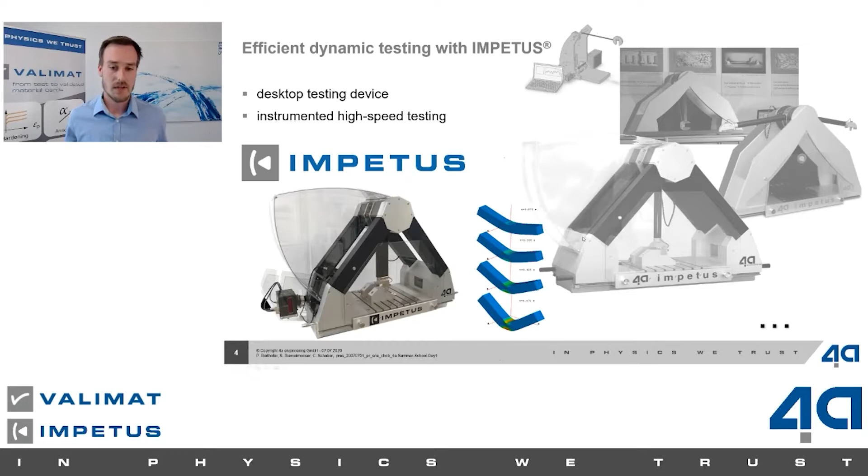First, I will talk a little bit about the IMPETUS itself. The IMPETUS is a desktop testing device. What does this mean? The IMPETUS is a testing device which doesn't need further infrastructure.

For example, on a big dynamic testing machine, on a servo-hydraulic testing machine, you always need a really good fundament and a really stiff floor to set it up, and you also need a strong power supply to use a high dynamic testing machine. Our testing machine also does dynamic testing, and therefore we can just put it on a table. This is the big advantage of the testing system IMPETUS, I think.

To the characteristics of the IMPETUS testing system, we can reach 50 joule of impact energy. What does this mean? The impact energy depends mainly on the mass of the swing hammer, which ranges from 1.5 to 5.5 kilogram. It also depends on the impact velocity, where we start at 0.5 meter per second and can rise up to 4.4 meter per second. With this combination, we are able to reach 50 joule.

Now I will show you a short video of our testing system, where you can see how the main workflow is through testing with Impetus.

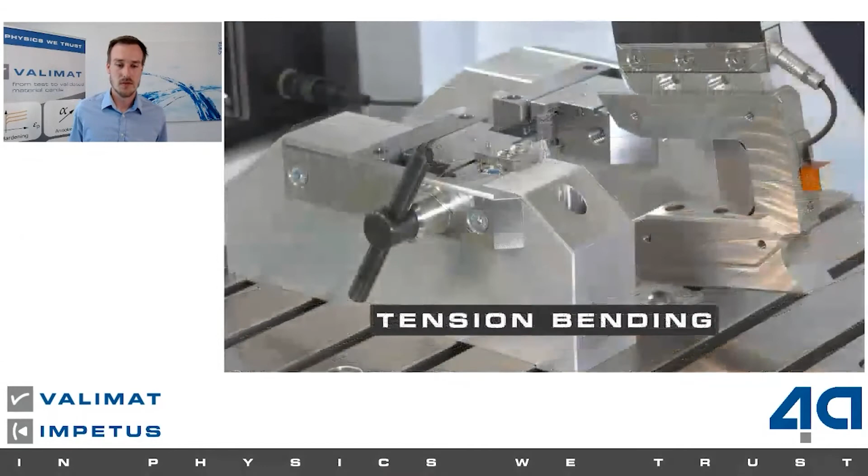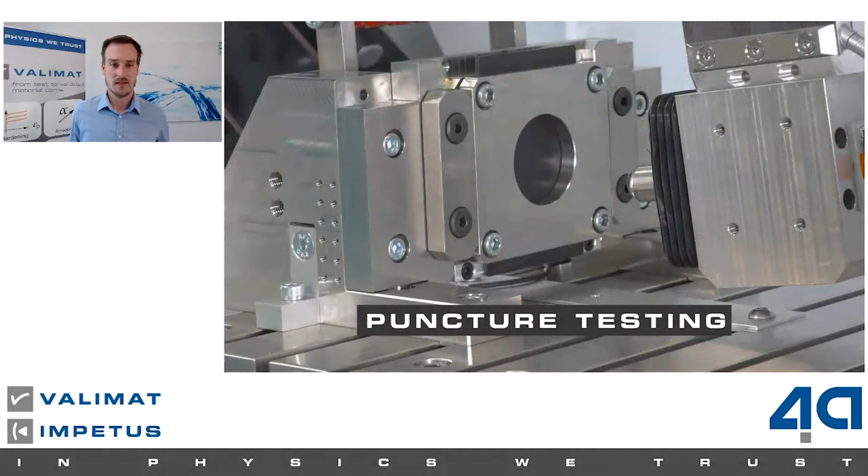Here you see a good look at our 3-point bending, tension bending, and puncture test. Here's a component test - it's a 3-point bending with small components, and the tensile test. Now you will see how we perform a test.

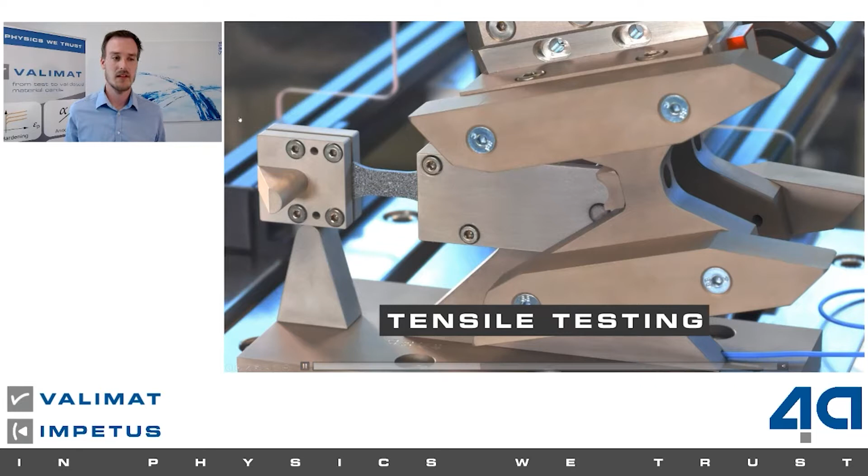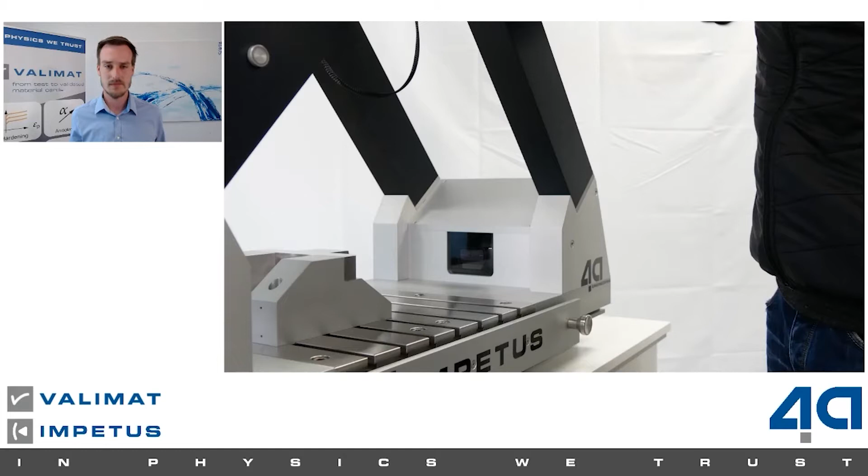Now we continue. As I've mentioned before, it's a really universal testing machine, so we're starting just with bending but developed with every new setup. Here we put in a bending sample. We have to close the safety screen and raise the arm to the decided velocity. The arm stops at the height we've decided before. Just once again - now we can push the green button.

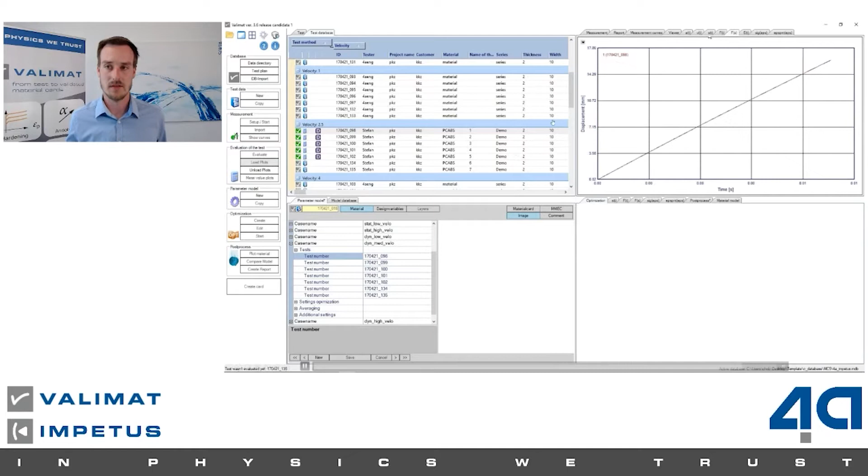The pendulum arm hits the test piece and the data is saved. You can directly see the data in the software we have evaluated, and you get, for example, the force displacement or the stress strain curve directly after the test.

Okay, so I hope it shows you the main workflow of how we operate with our system.

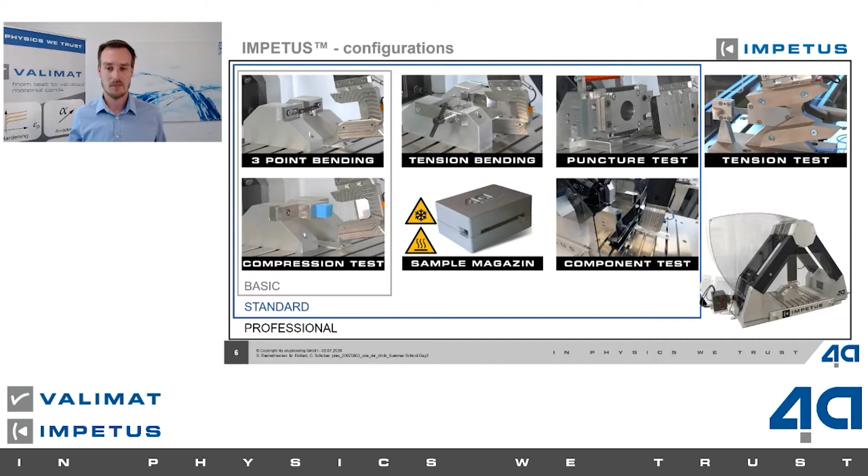This slide I will show you because you always have to think about your material class, what you'd like to test, because the material class depends on what test you can perform. So if we think about a plastic test sample or a thermoplastic material, for sure you can perform a 3-point bending test, a tension bending test, a puncture test, and a tension test. But you always have to keep in mind the dimension of the samples, and in particular you always have to think about the thickness of the sample.

For foams, we do compression tests for sure, so we can investigate the compression behavior of foams in a really high dynamic range. Composites will be tested with puncture tests and for sure with 3-point bending.

Here the last two materials are aluminum and metals. For sure we can test aluminum and metals with our system, but there are slight differences between them. For aluminum, we can also investigate the deformation behavior, and we reach failure in the tension test or in the tension bending test. But with metals, it's hard to reach failure, so we're mainly investigating just the deformation behavior, because we don't have that much energy for metals.

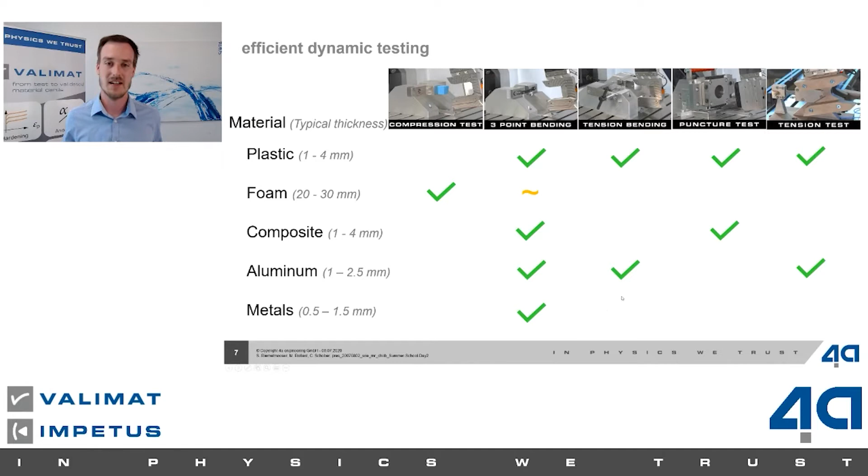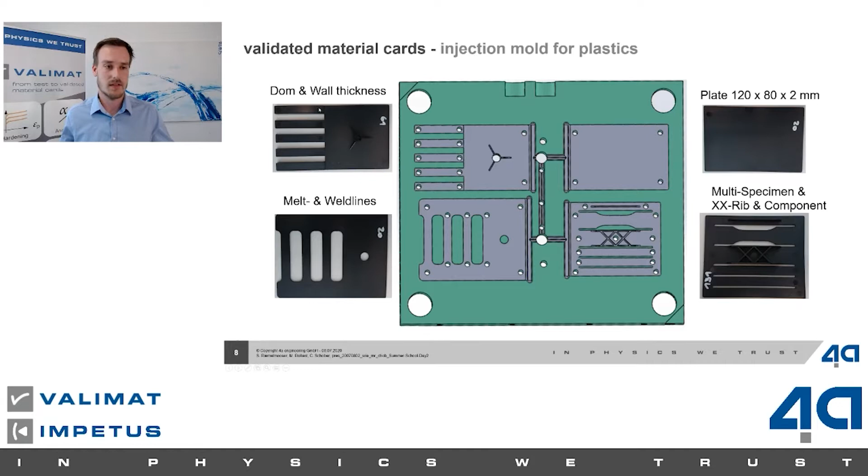When we use this plate, we also use it for the puncture test. This right plate is the component plate. Here you see the tensile test piece and a component. This component is called the XX-rib, where we can validate our material card. On the left side, you can see a plate with different thicknesses of this material, and we have a melt and weld line plate.

Okay, and now the last point I will show you today is a little bit about the measurement technique of Impetus, what we are measuring. In the tests, we use two acceleration sensors - one sensor is mounted on the pendulum head and one on the counterbearing side.

So we don't measure the force directly. We measure the acceleration of the pendulum head, and out of the mass of the pendulum head multiplied by the acceleration, we calculate the force.

The third sensor we use is an angle sensor. It's on the top of the test system. This angle sensor can give me a displacement with really high accuracy - we're reaching about 0.01 millimeter.

For sure, we have a bending fin and a support with a radius of 2 millimeters as standard. We can change it to a 5 millimeter radius if we want. As I mentioned before, we have a swing hammer mass of 1,580 grams. This could be increased by adding some additional mass, and when I add some additional mass, I raise the swing hammer mass, so I get more energy, more impact energy.

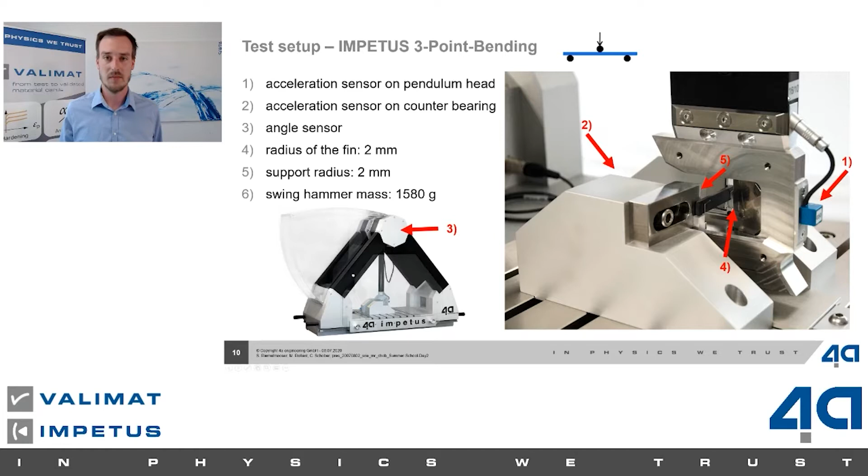And this slide shows you the raw data of the measurement system. It's important to know that we always store the complete unfiltered raw data in our database, so you are able to change the filter and to evaluate the test data again and again. But this topic I also will talk about on Wednesday in detail.

The red curve is the acceleration curve of the swing hammer. The blue curve, nearly a zero line, is the acceleration signal of the support. We use this support acceleration just to check if everything is fixed in the pendulum, because when the counterbearing system is not fixed, you will get an acceleration signal on the counterbearing, and you'd know something was going wrong in the test. But with this zero line, it looks good.

And the third channel we have here is the angle signal, which is decreasing as it falls down from the pendulum arm.

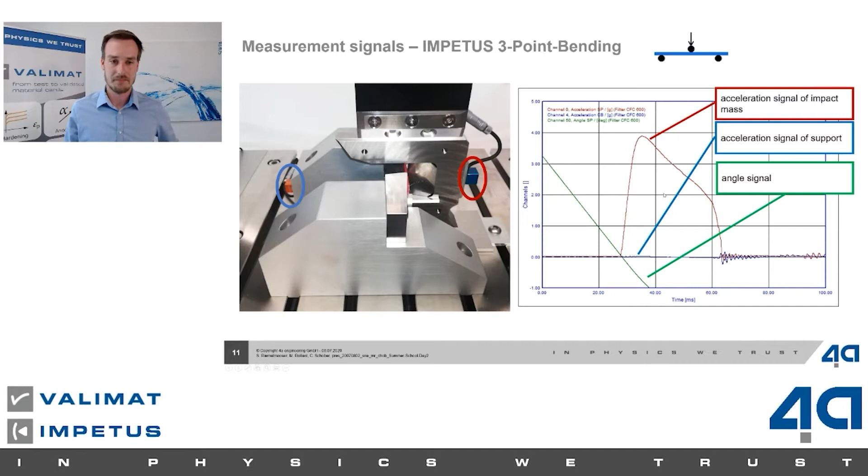This is the viscoelasticity and the viscoplasticity here in the force level. And not only the deformation behavior changes over the strain rate, also the failure changes with the strain rate. So we get an earlier failure at higher strain rates. And this you can see directly out of the measurement results.

Okay, so just a general overview. In LS-DYNA, we have around 265 material models implemented. In our case, for a plastic material, it usually comes down to the most used material model, which is MAT24, which we talked about in detail yesterday. And then there are other interesting material models for a thermoplastic polymer, such as MAT124, MAT187, and MAT187 Lite.

So what exactly are all these material models and why should you think about using them? Okay, so the MAT24, the workhorse, we spoke about it yesterday. We had a session where I showed you how you could fit an elastic viscoplastic material model for a polypropylene material.

So just to summarize, or look back, what is the MAT24 material model? It is a material model with a von Mises yield surface. You cannot define viscoelasticity with this model. Viscoplasticity is included. There is no tension compression asymmetry because of the von Mises definition, and you have the plastic Poisson's ratio of 0.5. So what does a plastic Poisson's ratio of 0.5 mean? It means that we have plastic deformation under a constant volume.

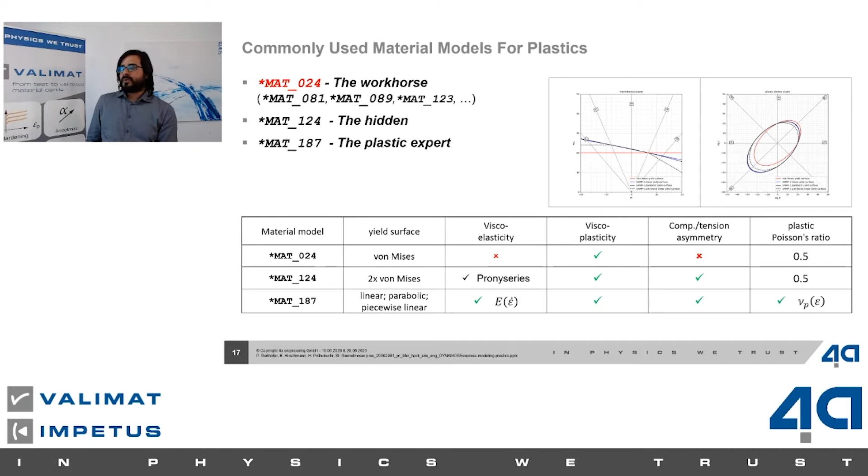You can incorporate that in a lot of different ways using the Drucker-Prager yield surface or even a general yield surface. But by far, the biggest advantage here is that you can actually define a plastic Poisson's ratio, which means you can take volume dilatation into account, which for a ductile material becomes very important.

We will have a very detailed look on this material model next week, so two of my colleagues here will talk about that. So now I've told you the good about MAT 187.

Now it's time to come to the disadvantage. The biggest disadvantage is that because this model is so accurate, so well formulated, the biggest problem comes with the computational effort. So by far, out of these three models, MAT 187 is computationally the most expensive material model.

LS-DYNA has recognized that, and they have provided us with a new model called MAT 187 Lite, very aptly named because it's an efficient version of the MAT 187.

So the one simplification that they have taken into account is the yield surface. You can define it linearly. You can, of course, define compression tension asymmetry and also take volume dilatation into account.

So we have implemented most of these important material models for plastics for all different solvers. So if you go into the idealization tab, for our viewers who were here yesterday, they are very familiar now, I hope, with the model database.

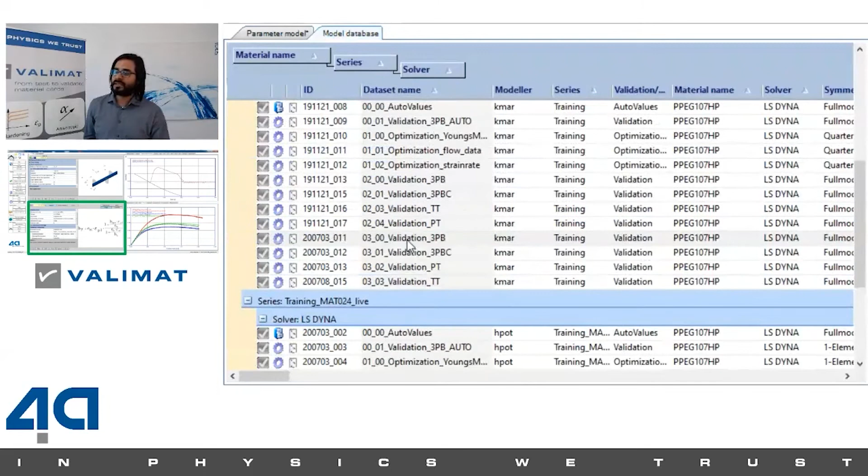So this window at the bottom left, this is exactly what we had yesterday. So if you go in one of these model databases, that is how that looks like. So we have the idealization part.

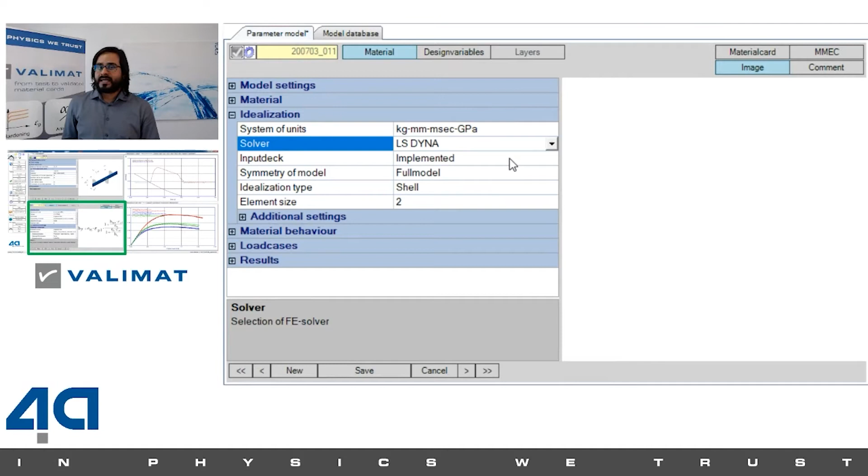And here you can specify what system of units you have, what is your solver. So we have different solvers defined here. Input deck is basically what is your validation that you want to do.

So it's a 3-point bending. Is it a puncture test? Is it a tensile test? And as I told you yesterday, all of these models are predefined.

So automated FE models are predefined, so symmetry of the model. We have also the idealization type, so shell or solid, and also element size.

When we go back into symmetry of model, we are extremely flexible here. So for load cases where it is possible to actually have all these different symmetries, they are all well defined. For example, for a 3-point bending test, we can work minimum with a half model.

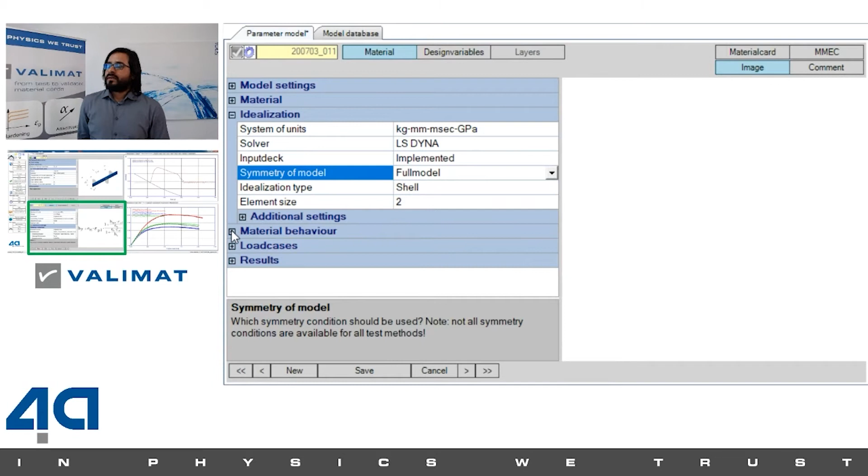And then we go further, first of with additional settings. Additional settings are basically you can define your element type. For the shell element you have selected...

Some extra parameters that define parameters in your automated finite element mesh. For example, the friction coefficient between the sample and the holder, for example, in a 3-point bending test. The Young's modulus of the support, the density of the support. So these are all the things that are automatically selected for you.

And then we have a very important number of element layers tab, which for shell elements becomes very useful because it basically gives you how many integration points you have over the thickness.

And then we go down. So VALIMAT is very easy in the sense that if you run through from the top to bottom, you can basically define your whole material model and you're ready to optimize or validate your material model. So then we go into material behavior.

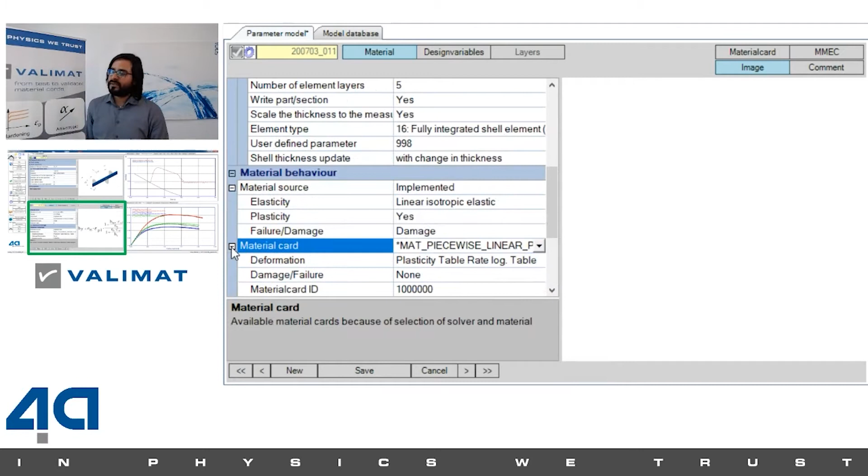This is the most important. So you see material source - they are implemented material models. And then we have a pre-selection of all the different material behavior.

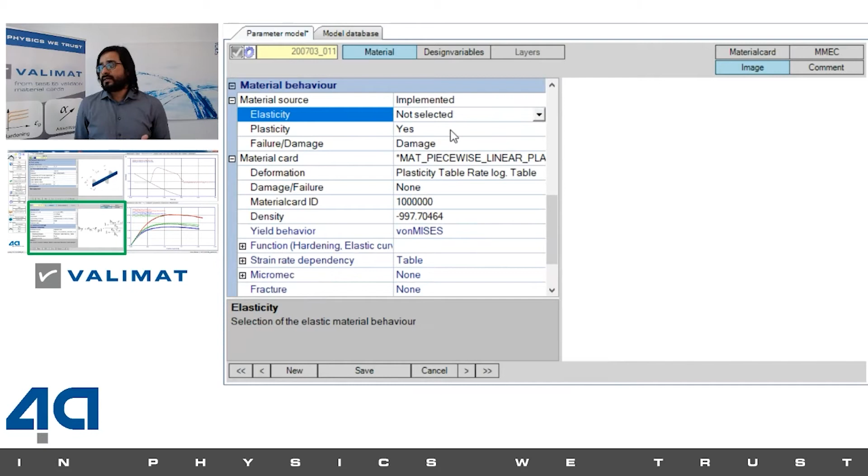So we have elasticity. So what do you want to have? A linear isotropic elastic, non-linear isotropic elastic, or an anisotropic elastic material. So if you put it on the top to not selected, you basically get a list of everything that we have.

So I would suggest my colleague put everything to not selected so we can see all the implemented material cards for LS-DYNA. So here we have a complete list.

So we have the simple MAT elastic, which is just an elastic material model. We have the MAT 24 that we looked at in great detail yesterday. Then we have some other models, MAT plasticity with damage, MAT 81. And then this complicated, very complex material model, or the plastic expert, which is the MAT SAMP-1.

Then, following that, we have some material models for composites, which my colleague, Mr. Reithofer, will talk about in detail on next Wednesday.

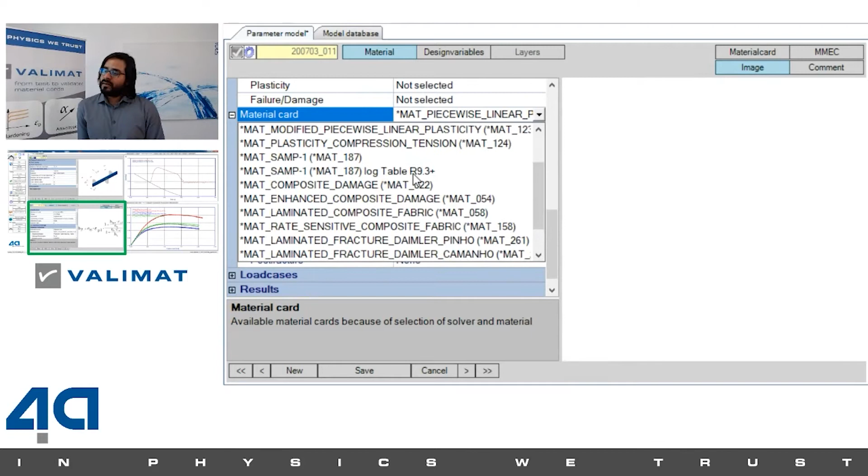So what I suggest to do now is I will just select the MAT SAMP material model, because we looked at MAT 24 yesterday. So after you select a material model, there are two important aspects: you select your deformation behavior, and then you select your damage behavior.

So when we go into deformation behavior, then we have a selection of the different yield surfaces defined. von Mises, the simplest one. Then we have the pressure-dependent Drucker-Prager, which has tension-compression asymmetry inherently defined. Then a parabolic yield surface and a general yield surface. So these are the options that the user has that he can calibrate his material model on.

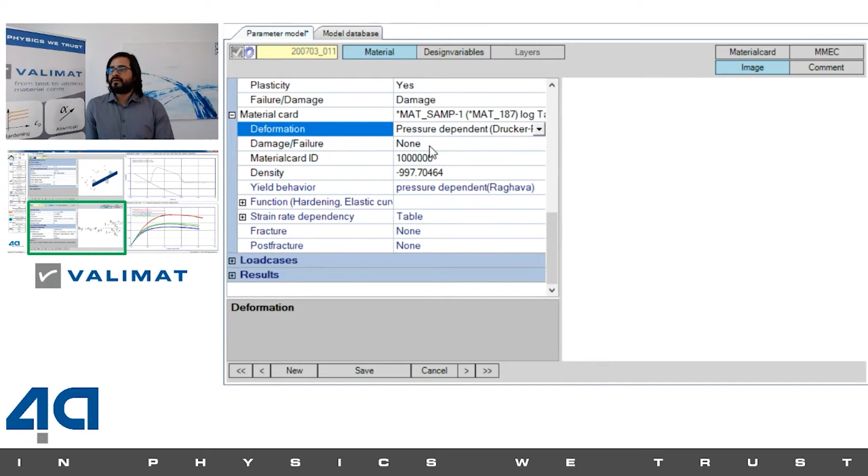So I would suggest we go to a Drucker-Prager here. And then the next decision we need to make is about damage or failure. So do you want to have damage or failure in your model, or you don't? So we go to add matte, add erosion DIEM, because that is something we looked at yesterday, the damage initiation evolution model.

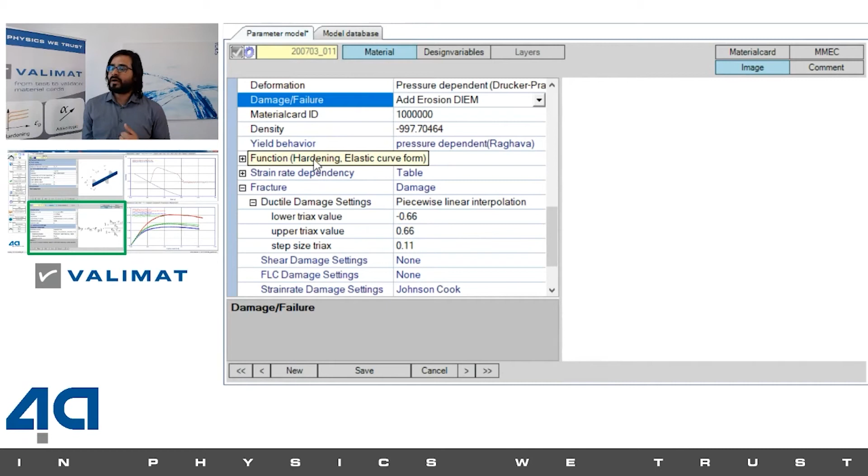And now you've pre-selected your deformation and your damage options. So now you go into detail about your selection, starting with your hardening function. Yesterday we looked at a 4A model, nue 0.5. The reason was, as I explained yesterday, we have plastic deformation at constant volume. So this is the model that defines that.

But now I would want to go into detail and say, no, I want to have a plastic Poisson's ratio definition. So we have the 4A model nue for that, or we have a whole host of hardening functions you can calibrate your material model on.

So you can either define this curve new, or you can, for maybe an easy implementation, say I would like to just scale my curve 1, for example. It's an easier way to go around it, and it's easier to understand for a first-time user to go through the software.

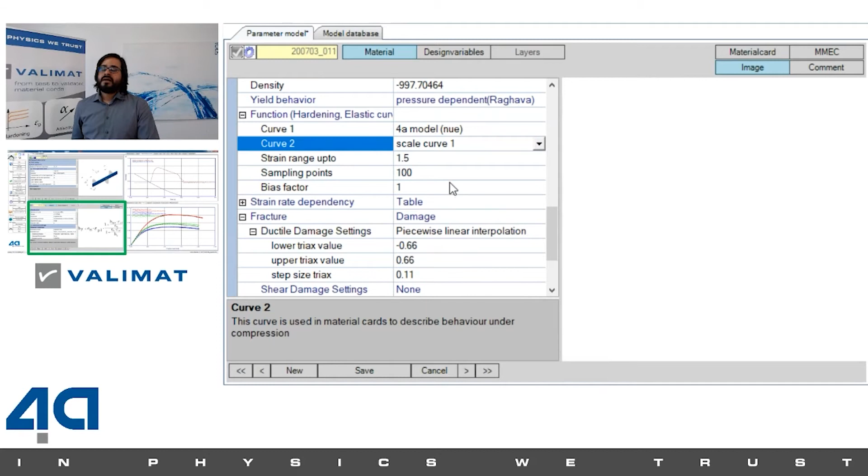Then we have the strain range up to, and the sampling points, which I've told you before yesterday was about having the right length of the hardening curve for your application. Because if it's too short, then the internal solver interpolations come into play. We don't want to have that. We would like to be as accurate as possible with our strain range definition.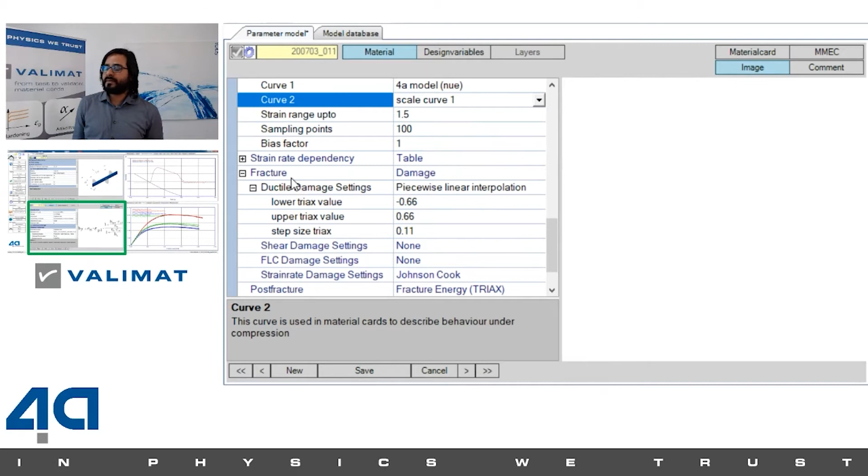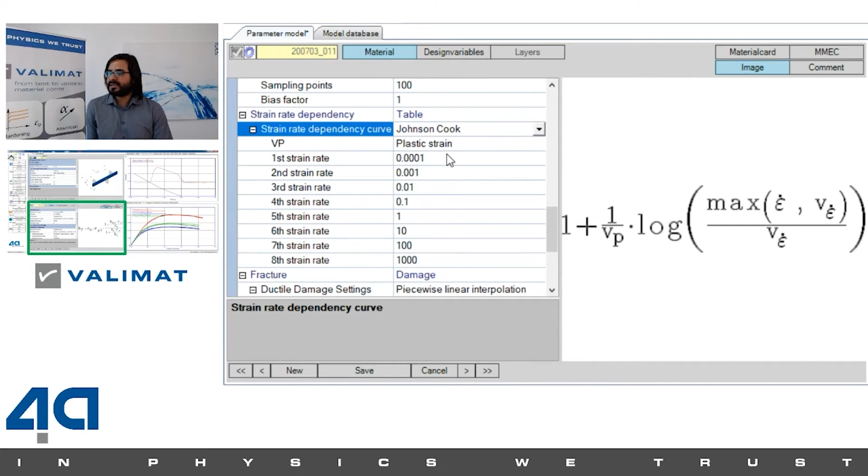Then you have said, yeah, I've defined my hardening function. Now let's define for a plastic the most important parameter, the strain rate dependency. Again, for strain rate dependency we have different models incorporated, so Johnson-Cook, the very popular model for strain rate extrapolation. So we go select Johnson-Cook, the strain rate dependency based on plastic strain formulation, or you can also use total strain formulation. And then you can define all your different strain rates.

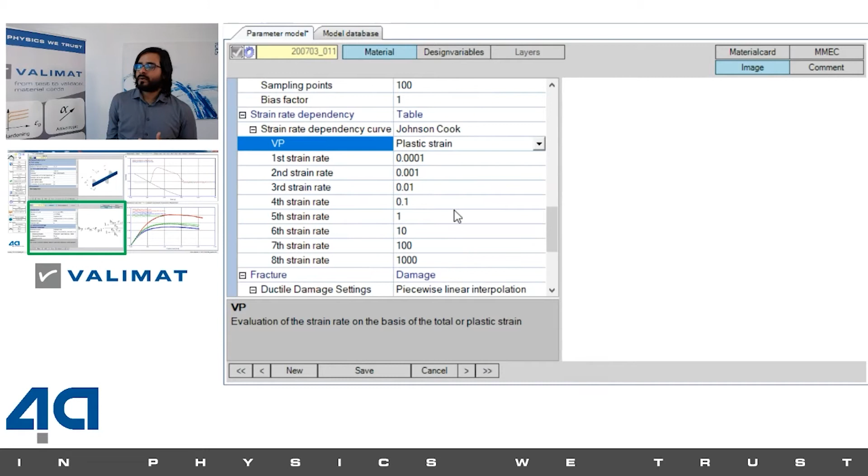And now you have closed your box, or you have checked your list of deformation. So now we have defined everything under the tab deformation for the polymer. Now we need to define damage.

And under damage, under ductile damage settings, we have again different functions defined automatically. Then we can select a function, for example a piecewise linear, a Johnson-Cook, or a Mohr-Coulomb model. So we choose piecewise linear, and this is very familiar from yesterday. We can define it stage-wise as a function of the triaxiality.

So the next important part is to define your load case, what load case you want to validate or optimize your card on. In this case, we have 3-point bending. And now we have gone completely from top to bottom, and we have defined our material card. So then we hit save, right?

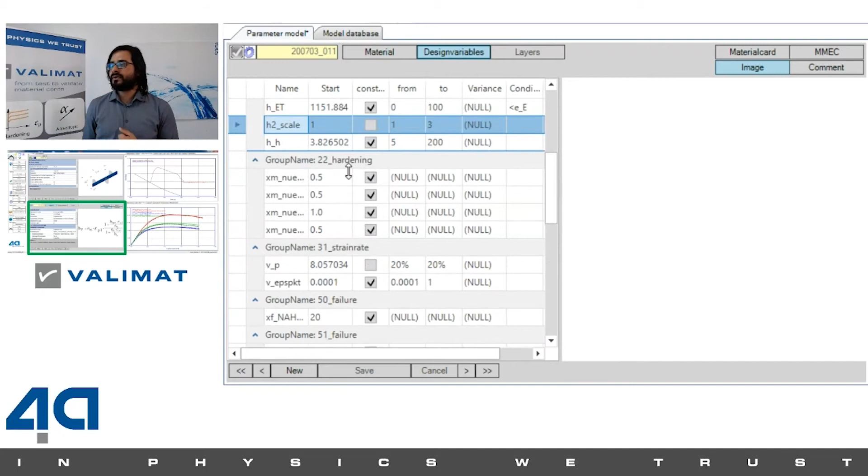And now when you go into design variables from material, the tab, here you see a list of all your different parameters. And the parameters that you need to define, you need to optimize, are all listed here, and they are sorted very well with names. So you have hardening, strain rate dependency, group name, failure with failure at different triaxiality levels, and then we have our failure strain rate and the post-failure options.

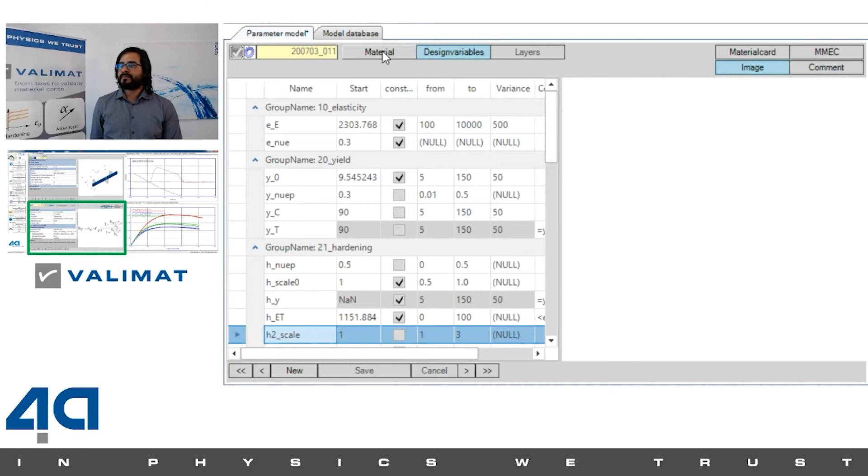So I hope each of you, if you get a version of VALIMAT, would now be confident enough to build a material model on your own to validate it. We're all set now. This was just a demonstration of the flow of how you select a material card in VALIMAT. So now going back to my presentation.

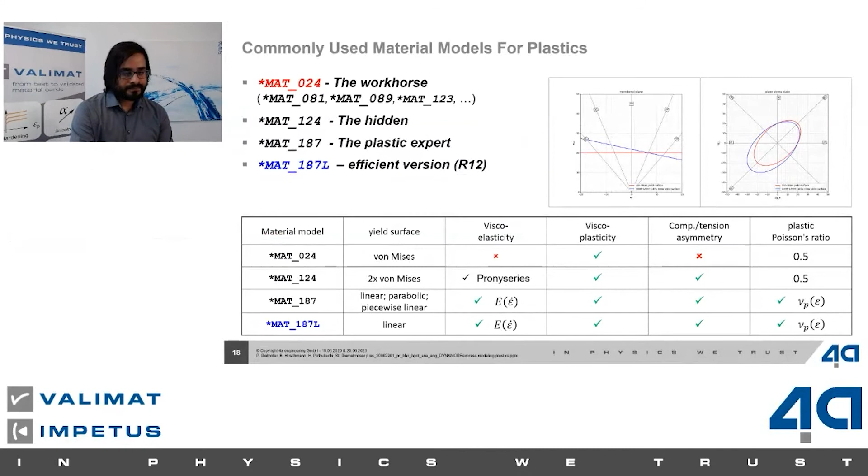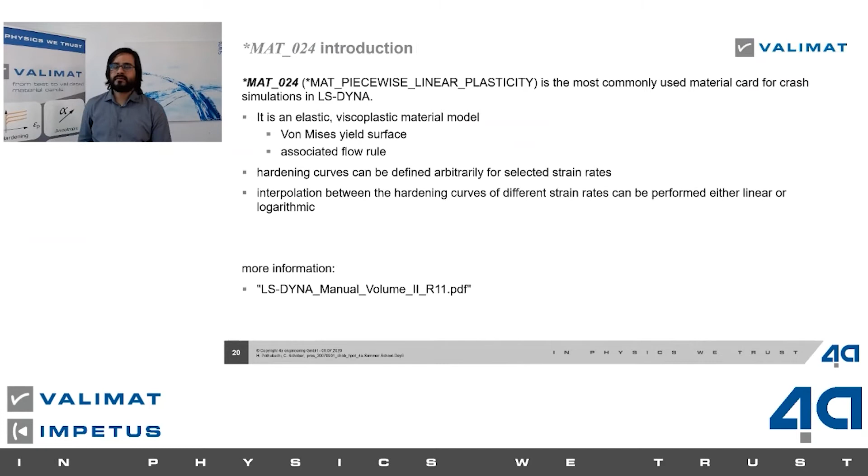A small summary of what we did yesterday with MAT24. Again, the same introduction of MAT24. What was our optimization strategy for the Autofit? We went through each and every step, defined each step, and then we ran an Autofit yesterday, which gets out a final MAT24 material card.

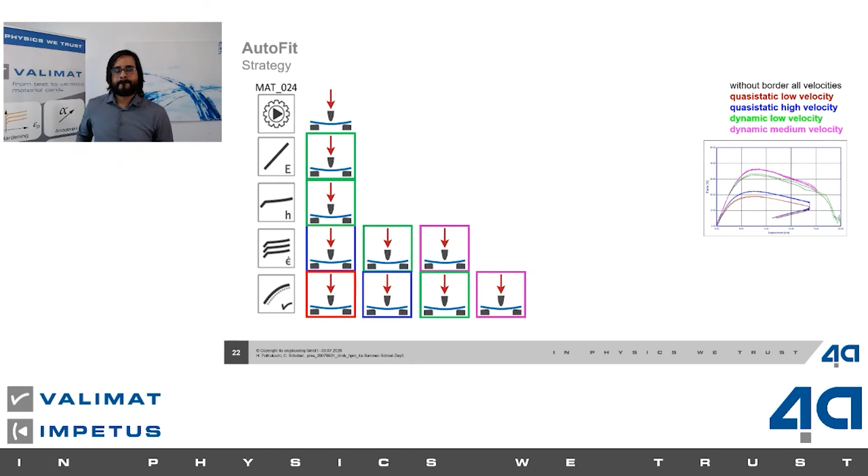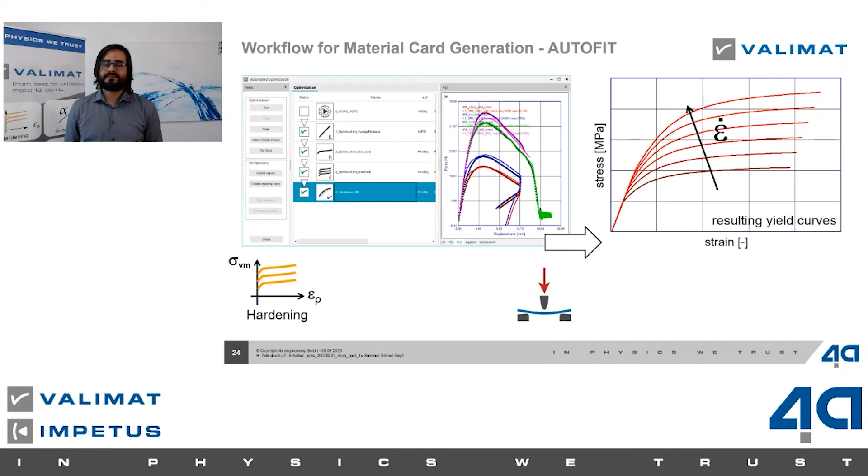After that, we looked at all our different validation results. We validated the generated material card with a puncture test, a tension bending test, and a tensile test. Then we set up simple failure based on the failure evaluation option in VALIMAT, which takes into account the failure from the test data, by setting of the failure time.

So we used a simple failure approach where we had a MAT add erosion DIEM material model. We had no failure under compression and up from 0.33. So the complete tension side was set to one averaged value, where the failure strains were averaged out for all the different tests that were conducted.

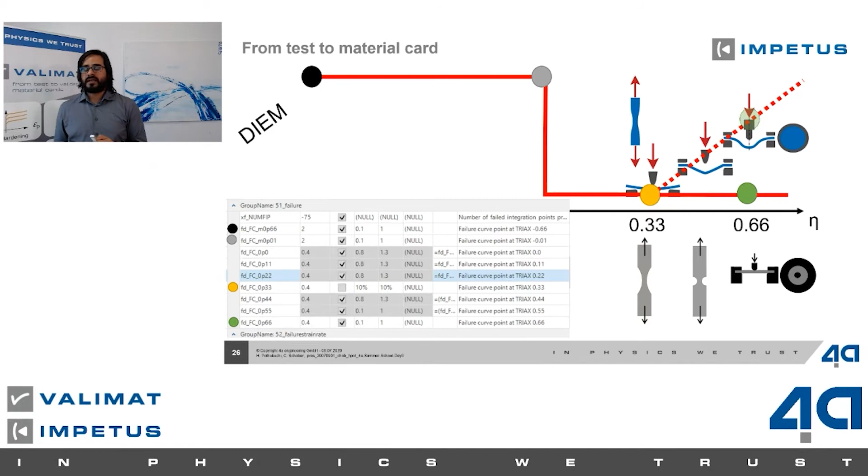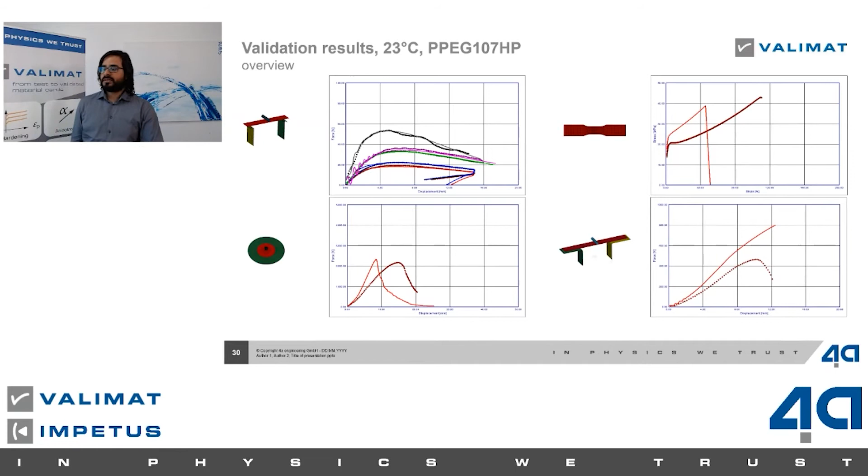So that was a brief summary. On more complex material models, we will talk a lot more next week on the advanced topics. There are two sessions planned. I will give you a small overview on those two sessions after the break. So I would suggest we take a small coffee break for about 10 minutes.

Hello everybody, my name is Benjamin Hirschmann. I work at 4a engineering as a method developer. It is my pleasure today to introduce the upcoming features of VALIMAT 3.8, which are mainly implemented by my colleague Mr. Berhard Dieker. So first step is an overview about the new features.

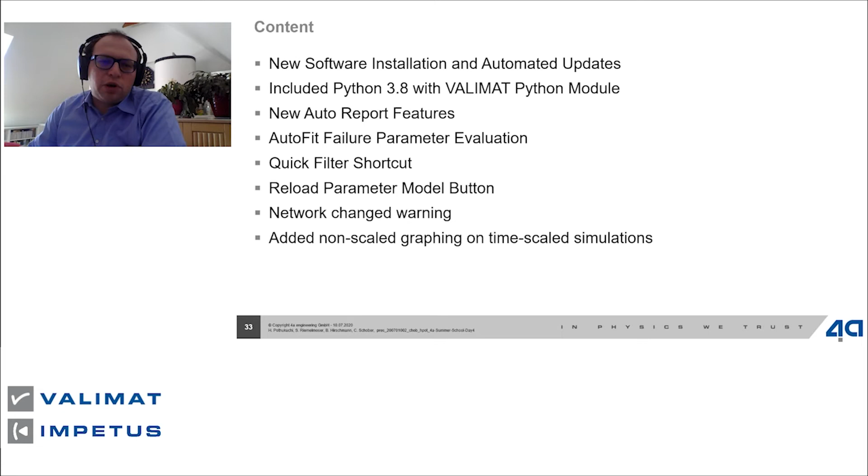First one is a new software installation and automated update feature. Then we have implemented Python 3, which will be delivered with our software. The next new feature is some extended auto report possibilities. Then we have the new Autofit failure parameter evaluation, a quick filter shortcut, a reload parameter model button, some warning for changing networks, and a possibility to plot time-scaled curves in simulation time.

So, first step, our software will now be provided via a batch script. You will send us some data over your local system. We will create a batch script which we will send to you. You can basically place it onto the desktop and then start it. The first call will start the installation of VALIMAT.

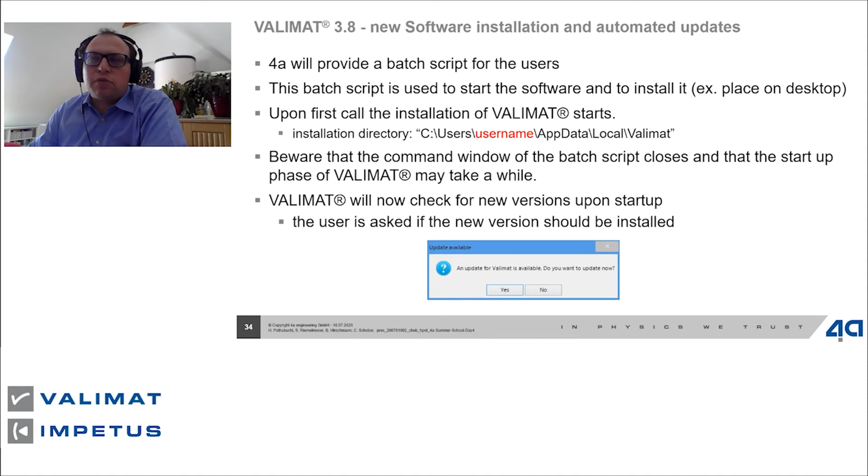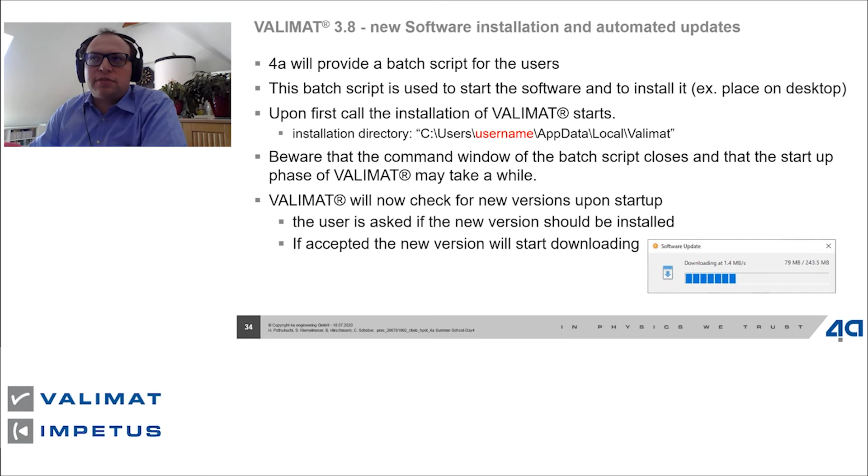VALIMAT will check if a new version is available, and then asks the user if you want to install the new version now. If you accept it, you will get a progress bar, and after that VALIMAT will be updated.

A new major feature of the new VALIMAT version is that it will ship with Python 3, which will be installed in a subdirectory of your VALIMAT directory. It will be Python 3.8.3, as the last versions are at the end of service lifetime and will not be supported anymore.

This new Python will have a VALIMAT module, which will allow for better access to the VALIMAT database, all the curves, and so forth.

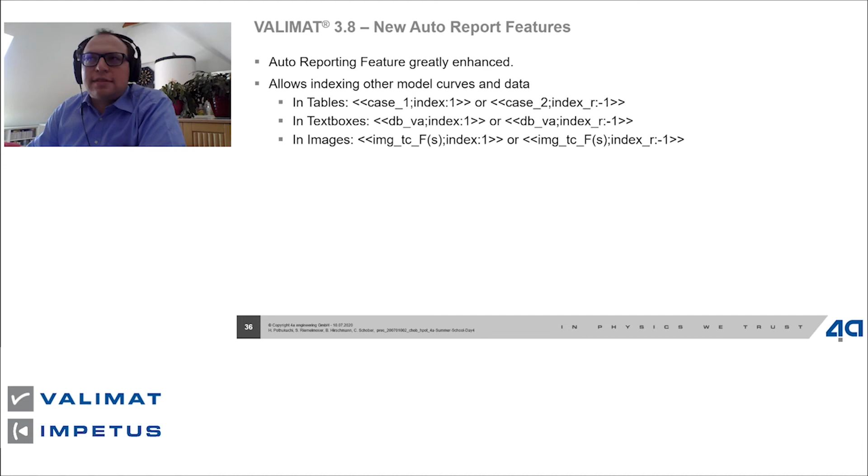The next step, which was improved, was the auto report feature. It has been greatly enhanced. For example, we added support for indexing for tables, text boxes, and images. You will shortly see an example for that.

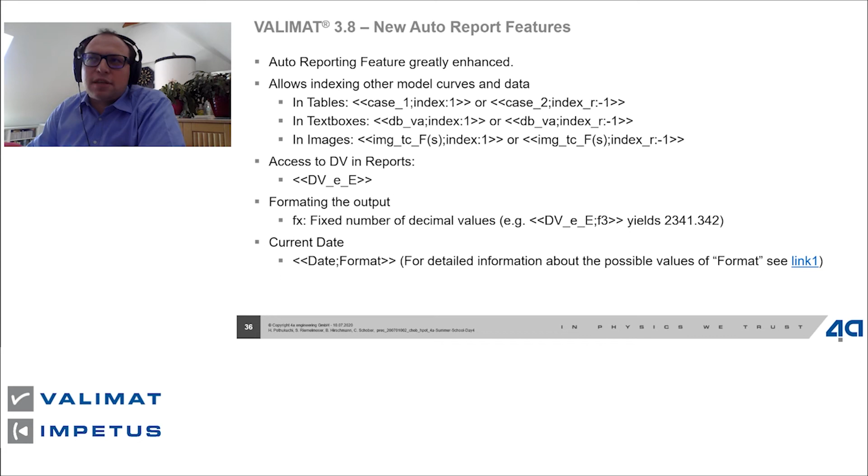We can now access the design variables and format them. We can also add a date, and the format can be seen in the link below.

For example, if you want to make an overview about our MAT_024 Autofit procedure, we can now add basically all the test curves, an image of the test curves which are linked in the first model with index 0, index 1, or no index, which is then the first selected model. Then we can index the second model for the Young's modulus, the third model for the strain hardening, and then the fourth model for the strain rate dependency, and then for the validation.

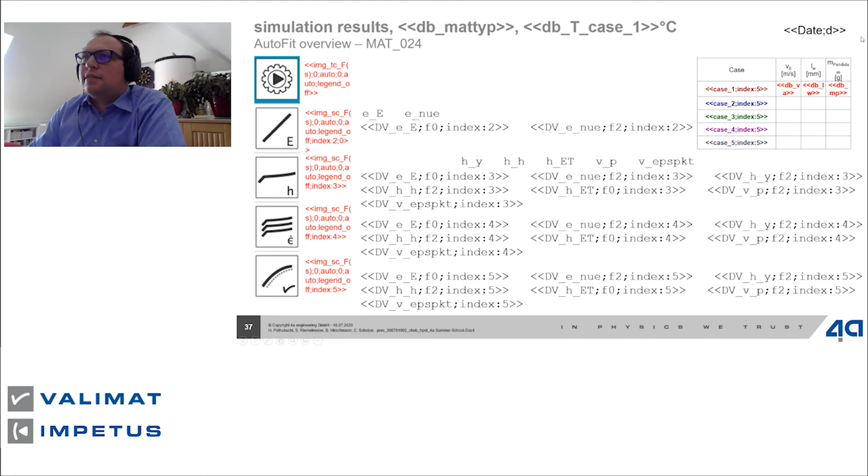To the right side, you can access the corresponding design variables and format them with basically 0 or 2 decimal places. You can also access the table of the validation case and add the date. If we execute this with VALIMAT, we can now have a nice overview over our fitting procedure.

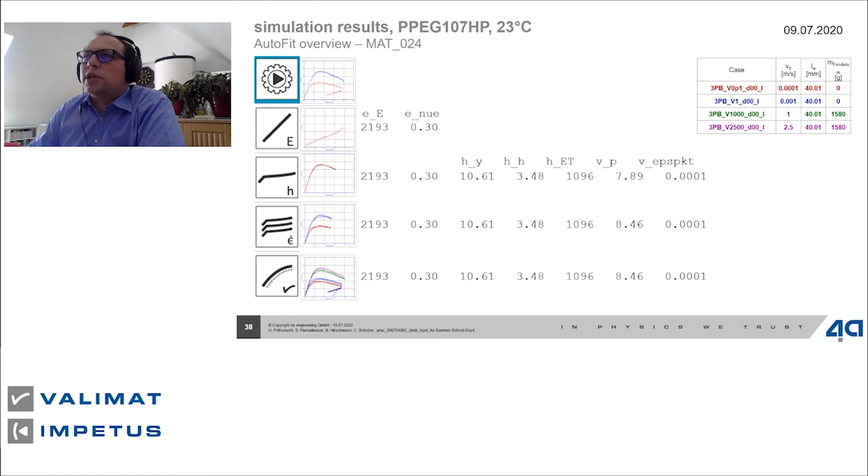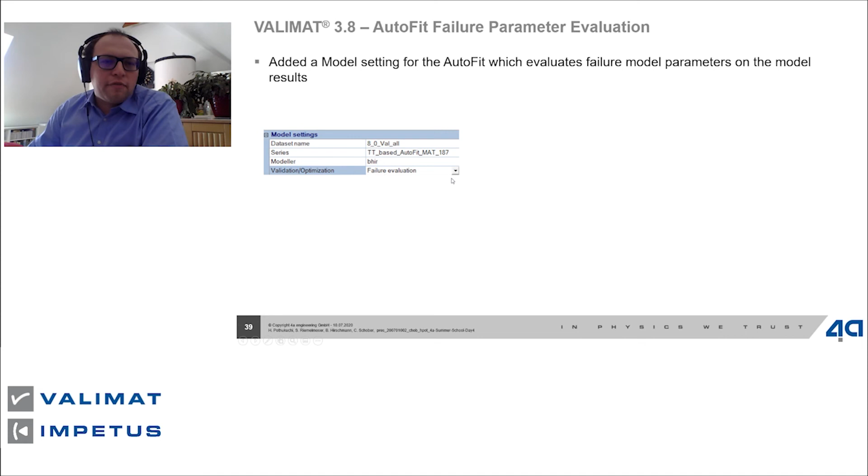Next step is an automated failure parameter evaluation. This can be added into the Autofit workflow. There, you will create a failure evaluation model which will basically make a validation of all the found parameters from the previous workflow, as you see here.

So you have fitted your card, then add this validation step, and in this validation step, with a failure model selected, the failure times of the measurements will be looked up — the element information, as well as the failure times — by the script, and then the failure model parameters will be fitted to these points.

And the fitted failure parameter values are then available as design variables in the steps below.

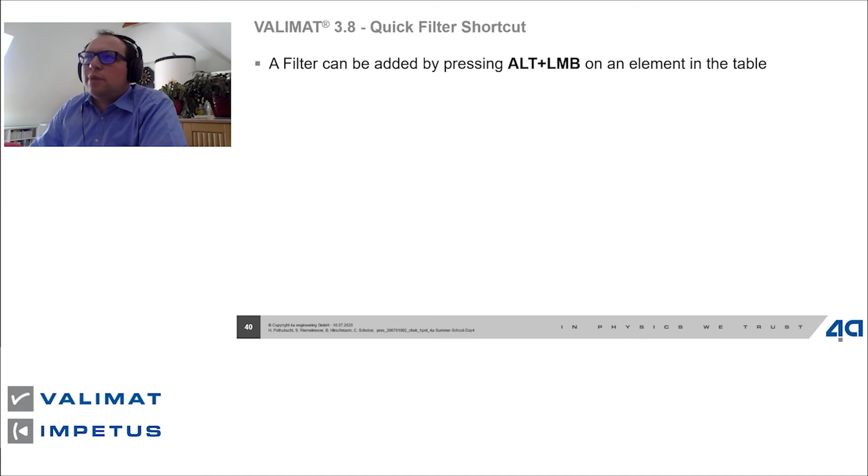The next convenient thing is a quick filter shortcut. You can add filters by pressing Alt and the left mouse button. For example, if you want to select all, or view only one element or more complex models, you can Alt+LMB onto this field in the database, and then the filter will be placed.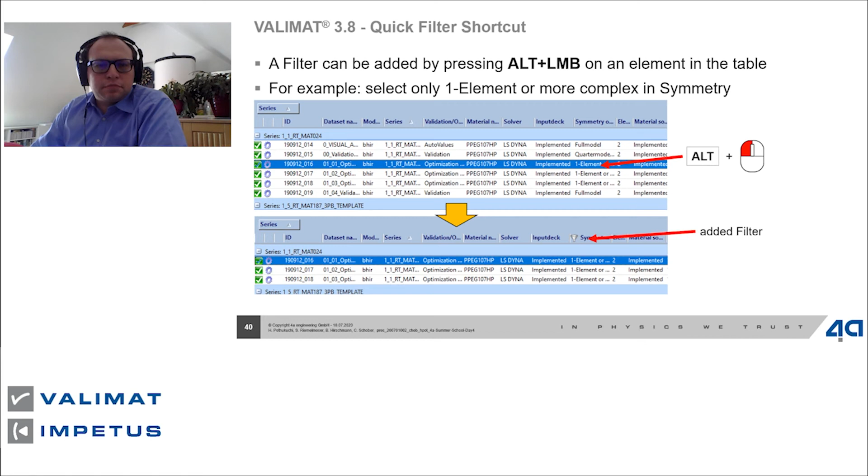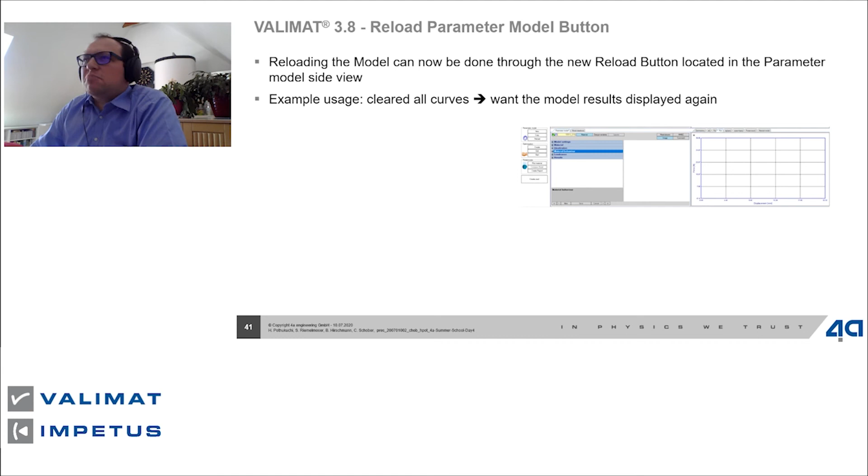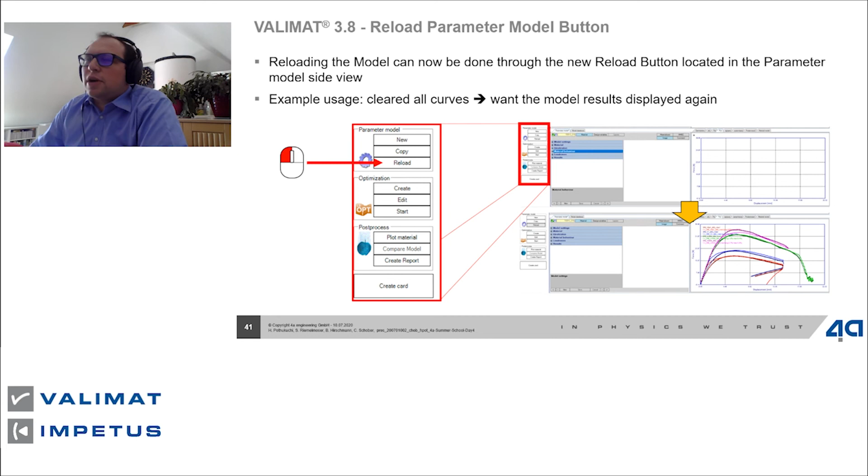Next step is a reload parameter button, which allows you to reload the model. For example, if you have cleared all curves in your right view, you can now go to the left side to the reload button, click it, and then get your curves back, or design variables, and anything else, as if you have just reopened the model.

The next part is we had a warning, because if you have a database on a network drive and you change your wireless LAN connection to this database, under some circumstances the database could be corrupted. So now you will get a text message from VALIMAT to please reopen the database.

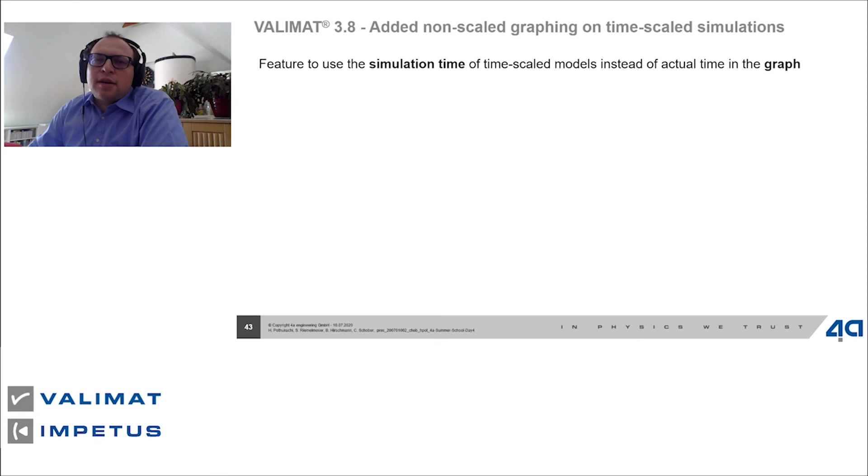Next feature came from a user — it was a requested feature. For example, you have static tests which you calculate explicitly with a time scaling factor. For example, MAT SAMP in some older versions is only implemented for explicit. If you then have the same time scaling factor as the difference between these tests, then you can plot the simulation time instead of the real time, to make a comparison in your force-time curves or your displacement-time curves. If you select in your model the plot result curves timescaled and set it to true.

It's a somewhat improper but convenient method to compare these kinds of models.

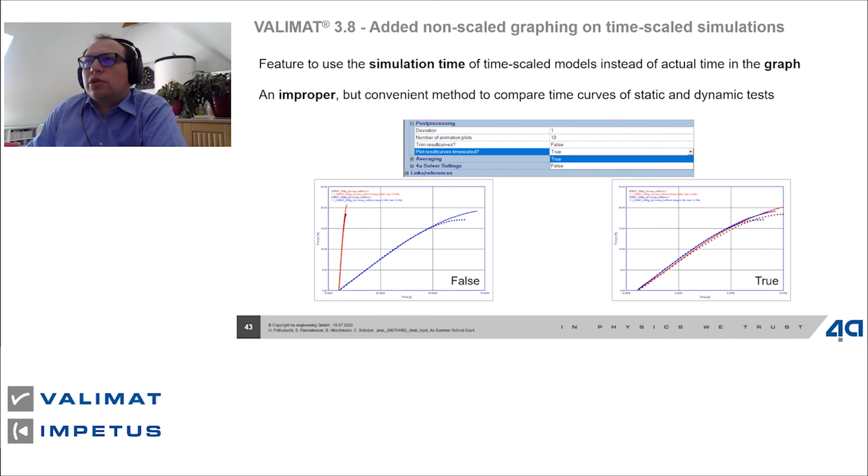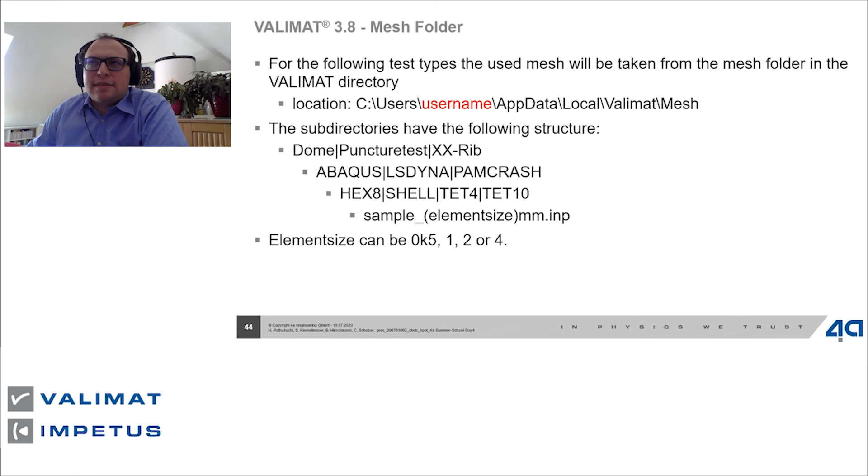Another addition is a subdirectory in the VALIMAT installation folder. If you add specimens there in the correct subdirectory structure, you can overwrite the implemented VALIMAT meshes for these cases. For example, you can change the puncture test specimen mesh for DYNA models, and the element sizes you can choose are 0.5, 1, 2, or 4 millimeters.

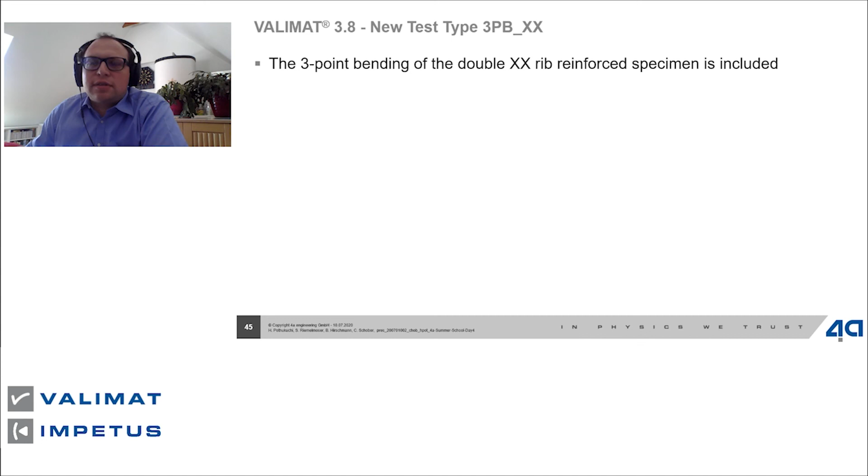The next addition is a new test type in VALIMAT: our 3-point bending test with a double XX rib reinforcement is now included in the test section. If you select it, you can also simulate it with these meshes, which follow the same naming convention as the user-defined meshes from before.

This is the end of the new features overview. There have been some bug fixes and so forth, but these are the main new features. Thank you for your attention and goodbye.

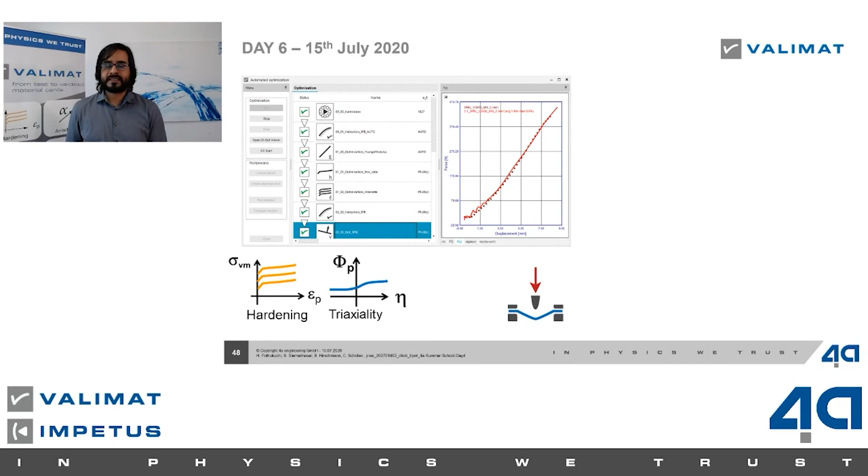At the end, we will do a validation on all the conducted tests. The other important aspect here is that we will take a deeper look into setting up complex failure. Yesterday I did a simple failure with no strain rate dependency, but next week we will go into greater detail over setting up failure with strain rate dependency also.

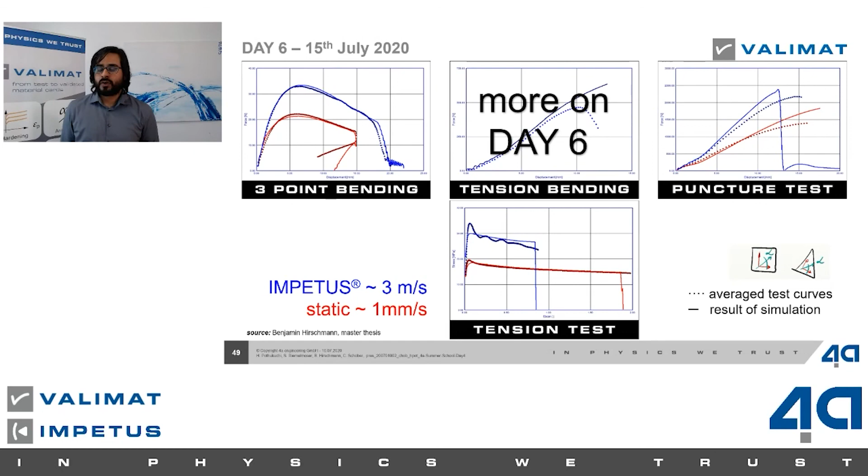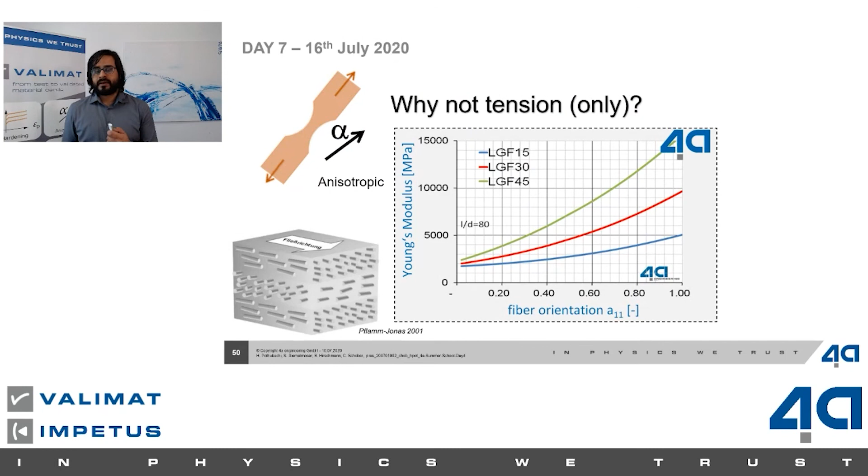On day 7, we deep dive into fiber reinforced thermoplastics, the different modeling guides and techniques, how you can use VALIMAT to also make modeling fiber reinforced thermoplastics much easier. This will be a topic dealt with by Mr. Peter Reithofer.

On day 8, we jump into the software again, VALIMAT. We deal extensively with user-defined specimens, user-defined input decks and material cards, which was also a very requested question from the audience on how do we incorporate new materials into VALIMAT and how do we work with that. This day will be interesting for all those who want to know how to customize VALIMAT to incorporate different material models.

Another interesting topic for that day would be possibilities in VALIMAT with Python. VALIMAT is already capable of doing a lot of things in an automated manner, but when we couple Python to it, some extra functionalities can be added, which would greatly help with the process of material card generation, or to evaluate tests in a better manner, or even do simple things like create a video from high-speed tests, everything that can be integrated with Python.